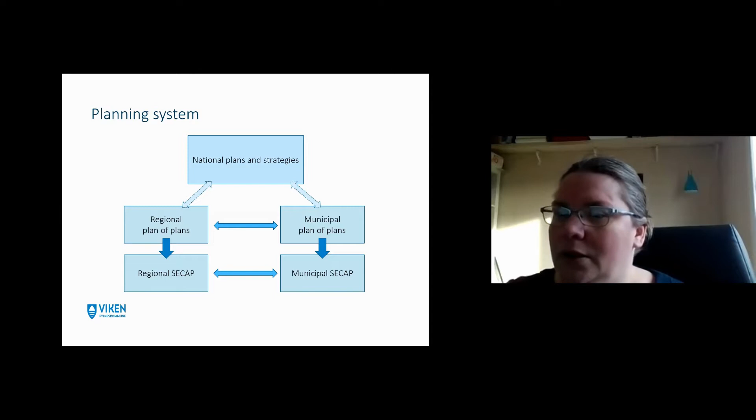We do not want to import all our food to Norway, but grow more ourselves. Less than 3% of our land mass is suitable for growing vegetables or grains, and the rest is basically mountains and snow. Grazing animals, such as cows, sheep, and reindeer, can produce food in the north, but they do emit methane. So we are discussing both how can we reduce emissions from agriculture and how can we store more carbon in the soil, in the grazable areas, in the forest, and in seaweed.

Some municipalities and regions set goals where they include carbon storage and thereby reach 100% net emissions. Viken has both - we have a very challenging 80% reduction goal, and this means that everything but the agriculture has to reach zero.

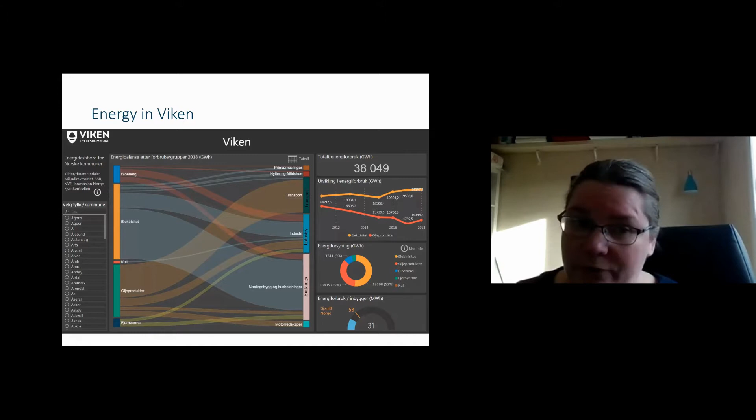We have in Viken set new goals just before Christmas, and we are currently in the beginning of a planning process where we are moving from these 2 regional SECAPs to 1. We are looking at an 80% reduction of scope 1 and some scope 2 emissions. But we also have set ambitions for targeting scope 3, the reduction of footprint in the goods and services we buy. And we have goals focusing on climate adaptations.

We have had a lot of discussions with our municipalities on how they should structure their SECAPs. Most are either separating the adaptation measures into a risk and vulnerability plan and only focusing on mitigation in the SECAP, or they are making integrated larger plans covering both adaptation, mitigation, and other topics such as biodiversity, transport, area planning, etc. I've even seen some smaller municipalities that have one annual plan covering everything. As long as everything is covered, all of these ways can work. But I must admit I've seen few plans that have managed to successfully integrate both biodiversity and climate into one plan. It often gets quite fluffy and not very clear.

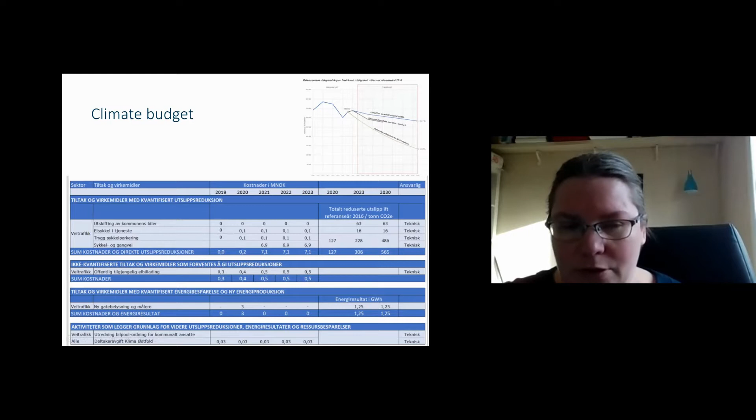To implement measures is, of course, the most important part of it all. We make our SECAPs through cooperation between the municipalities and between the municipalities and the region, and we implement them the same way.

We have established partnerships with the municipalities where we share the cost of a wide range of projects. We have partnerships with the agricultural sector where we provide training in energy efficient tractor driving, workshops on establishing solar energy on your barn, and much more. And we have a Pentahelix task force partnership with a steadily increasing number of businesses, NGOs and groups representing the citizens, academic partners, and representatives from the local, regional, and national authorities.

All of these partnerships are active in different projects, both with national and European funding. Some of the most successful currently, in addition to the Pentahelix projects, are a project where we let municipalities borrow fossil-free heavy vehicles and machines and test them.

I will leave a link in the chat where you can go and look at the machines. Most of the text is in Norwegian, but if you click on the links, you will find technical details and photos, and often links to English descriptions. So you can see many of the fossil-free machines.

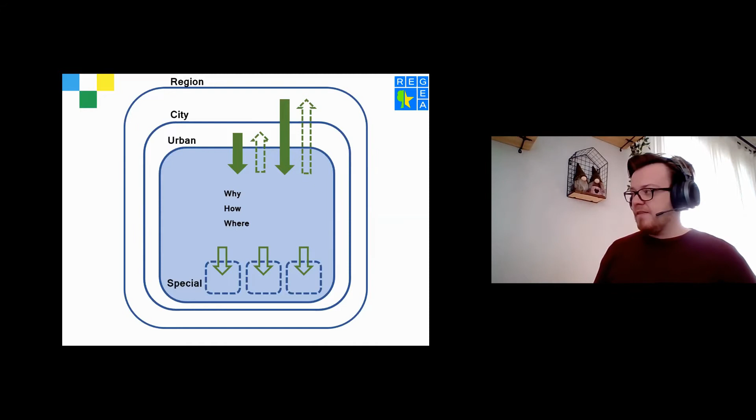And this is basically where we come to this issue of planning and implementation. So of course, depending on the structure of your country, it can be more centralized or more decentralized. In Croatia, we are very, very centralized. Usually there's a lot of tools to plan things. However, the implementation side lacks. And the key reasons for this are, on the first hand, very often the inability to set mandatory goals, and on the other hand, there is, of course, the issue of finance.

And I will now try to briefly present a couple of measures that we have started implementing in cities to try and combat both sides.

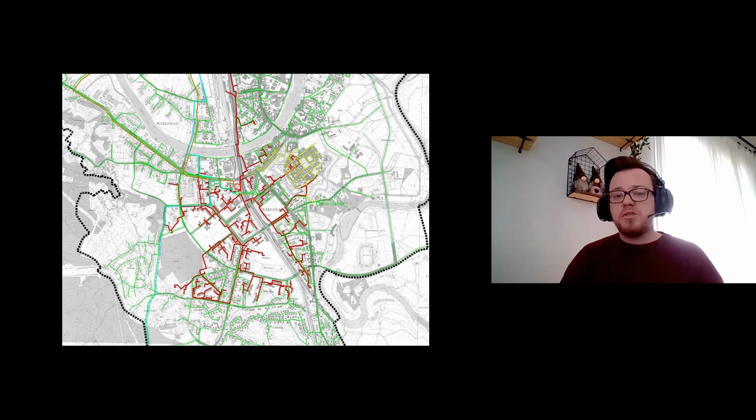And on the other hand, since climate planning is still very much in its infancy in Croatia, and I would dare to say most of Europe, a variety of negative climate effects are still very prevalent in our cities.

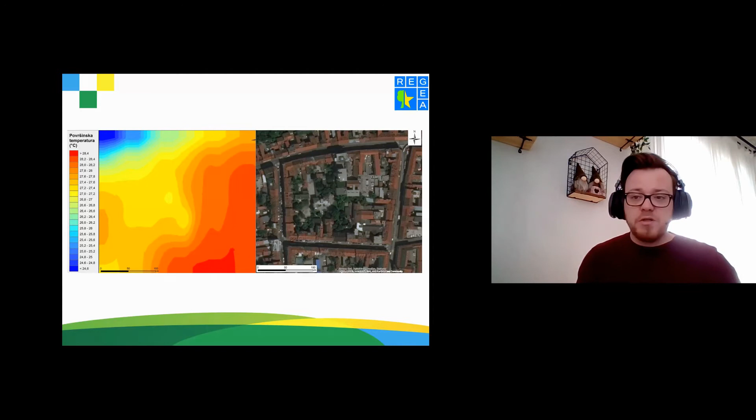This is also something that spatial planning doesn't really take into account properly. So the first thing we've started doing, now piloting in the city of Karlovac in Croatia, is to try and create our country's first green spatial plan. The principal idea is to properly and holistically integrate energy and climate measures directly into the city's spatial plan. Spatial plans come in a variety of levels - regional, city, urban, and special ones that cover just a small part of the city. So it's very important that such measures are integrated properly on all levels and correlated between them.

What will we provide in this case? We will provide proper measures that need to be implemented, definitions on how and where these measures should be implemented, as well as the spatial distributions of these measures. This can range from setting an above-standard of energy efficiency for a certain part of the city, to an outright ban for the use of fossil fuels in heating, to a mandatory implementation of green infrastructure, such as green facades, or simply trees next to roads or on parking places.

The primary driver here is that spatial plans are mandatory. So any measure that comes into it from a SECAP or any other source is law, and it cannot simply be ignored, such as action plans can.

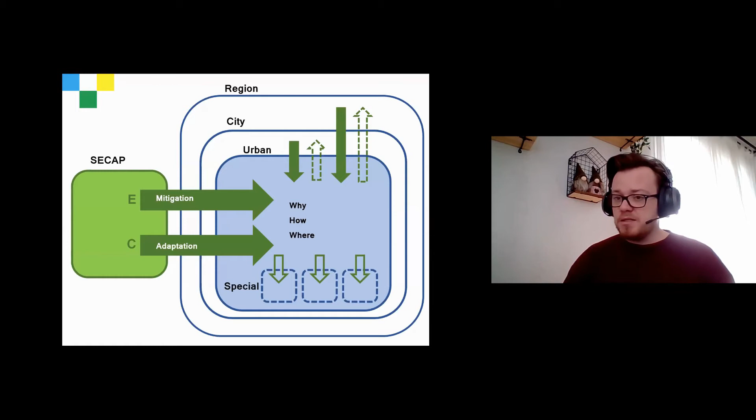And then there's the green infrastructure I've mentioned. As you've maybe heard, the city of Zagreb has been struck by a devastating earthquake, actually a series of earthquakes, that have caused severe damage to the city center. And as Churchill said, don't ever leave a good crisis unused - the city is now planning a very ambitious strategy to rebuild this city center.

This will include both the energy efficiency of the buildings, new sources of energy production, and also green infrastructure. This can be a very nice addition to any spatial plan - basically clear outlines of where and which types of green infrastructure should be used.

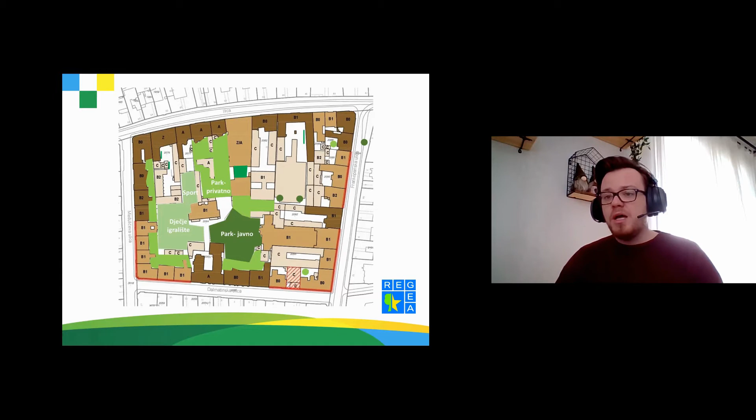Here you can see that same exact block I showed you a couple of slides ago. This is a draft plan to slowly transform it into a proper green oasis within the city itself, and with that also combat a lot of the climate issues we've seen.

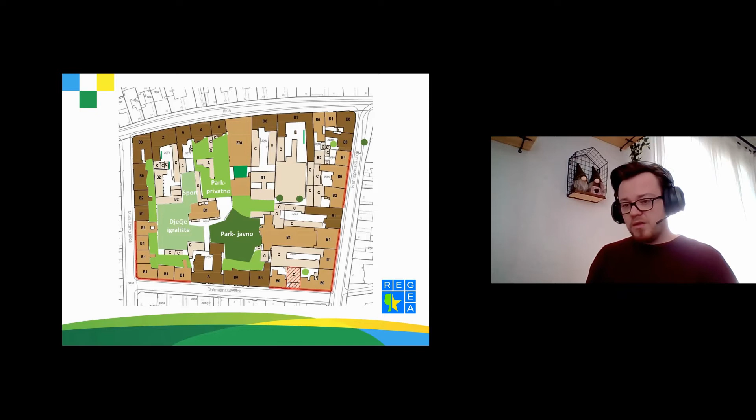Aside from planning, a huge issue for the implementation of energy and climate measures is, of course, finance. I don't know the exact situation in all the countries present here, but a huge issue that a lot of Croatian cities have is public debt - most cities are already indebted up to the level that they can take debt, so it's very difficult to accumulate enough resources to invest in high impact measures.

The way around this, the most efficient way, is the use of private capital. However, it's very often problematic to attract private investors into energy efficiency projects, especially in Croatia, due to the low prices of energy. Energy is still very often a social category, especially in Eastern Europe, so prices are kept artificially low, and realistic payback periods on a lot of energy efficiency measures can be 15, 20, even 25 years. Electricity production, on the other hand, is a different topic.

Here you can see an example of a power purchase agreement project that we have facilitated in the city of Zabok - specifically a large PV power plant constructed on the hospital's roof through a power purchase agreement contract. The key driver here was to attract a private investor to install a PV plant on the hospital's roof, and using that PV plant, the private investor sells electricity to the hospital at a rate 10% lower than they would buy electricity from the grid.

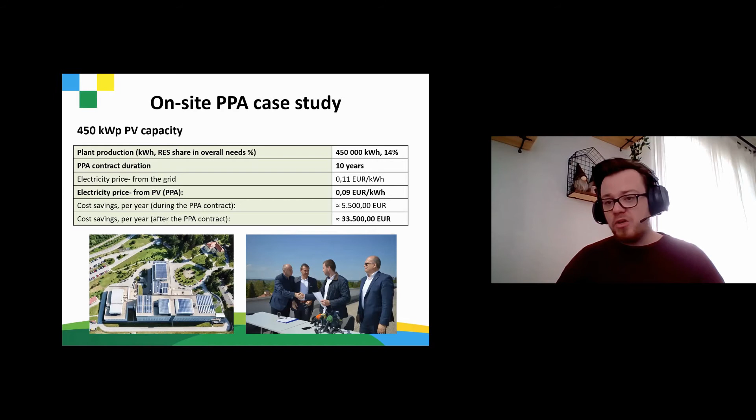After the contracts end, the hospital becomes the owner of the PV plant. The payback period for the private investor is between 5 and 7 years, so they still have a fairly decent margin to make profit. And the best thing is that the municipality or the public partner in this process does not have to pay anything up front, basically doesn't have to invest any of its own money, and therefore doesn't have to take up any debt.

The same process can also function for heat through a heat supply contract. This is another project being implemented in a school in our region, where through a very similar model, a fuel oil boiler has been replaced by a wood chip boiler. The issue here is that heat prices are fairly low, and the investment into a wood chip boiler is fairly high, so this project did rely on some subsidies. However, it functions on a very similar model, where the public side, the municipality, doesn't have to invest any of its own money, no additional debt is incurred, and they still receive a renewable source of heating.

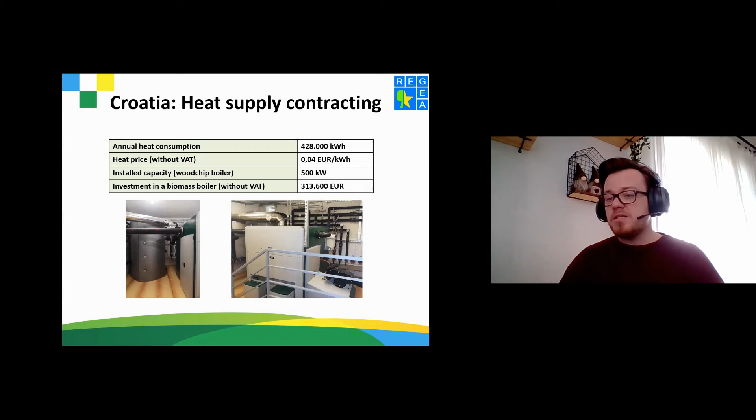Just to conclude, since my time is running out, a couple of lessons that we have learned throughout the last few years. The way forward, at least for us, is to integrate energy and climate directly into spatial planning. You can see a lot of examples of this happening across Europe.

Probably the most prominent and currently most famous example would be Vienna with its climate neutral zones, in which they have forbidden the use of fossil fuels, basically banning natural gas for heating.

It is very important to build up capacity within the local and regional authorities, and especially to enable them to use existing tools, such as the aforementioned spatial plans, for climate and energy purposes.

It is also very important to have a certain flexibility when defining energy and climate policies. As I mentioned, Croatia is a very centralized country, and we have this issue of our targets coming to the cities top down, without taking into account local resources and local potentials, making the whole process far less effective.

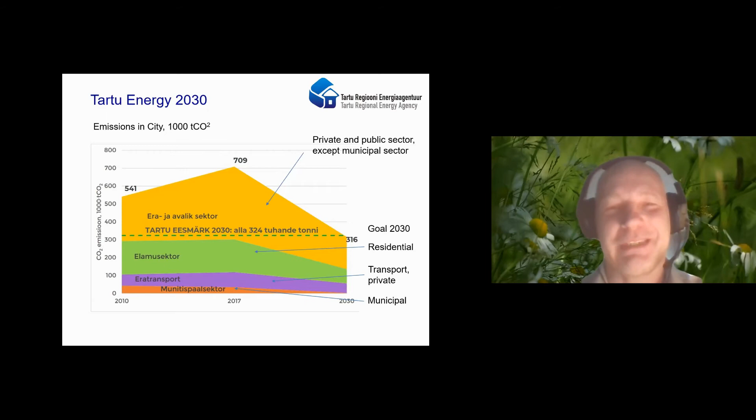So about this agreement, I can speak maybe next time, but today we will focus on the residential sector and the housing stock.

Renovation is not going very fast in Estonia and in Tartu as well. Tartu is maybe the second fastest city on renovation progress, but anyway it's not going as fast as we'd like, and that's why we had a demo project, and about that project I will tell you. But overall, in the city of Tartu we have close to 1,000 multi-apartment buildings, and in this slide you see the renovation progress by year of multi-apartment buildings.

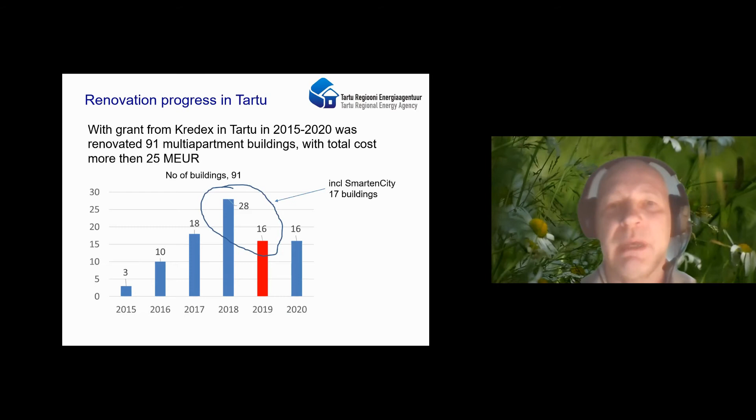We have a national support grant for renovation, and today it provides 30% of costs for renovation of multi-apartment buildings, and from last year they started one for single family houses as well. So we have both grants on the table, and it helps a bit, but it's not enough, and that's maybe about the cost in Estonia — we have a problem with money, as always, in the residential sector.

So, it's last year and the average cost of renovations - usually when a grant will be launched and announced publicly, this makes the market, let's say, a problem for businesses. Businesses see the opportunity, especially construction companies, and the prices of renovation start increasing a little bit. So it's always a problem. Our government and Kredex announced more stable grants, because previously we had yearly grants - every year they'd announce grants would be available, but now they like to announce that the grant will be available for 4 or 5 years, so it will make the market more stable, and we hope the prices of renovation will be stable as well.

But it's a barrier, one problem in this movement. But anyway, to make renovation more attractive, the City of Tartu was part of the project Horizon 2020 called SmartEnCity.

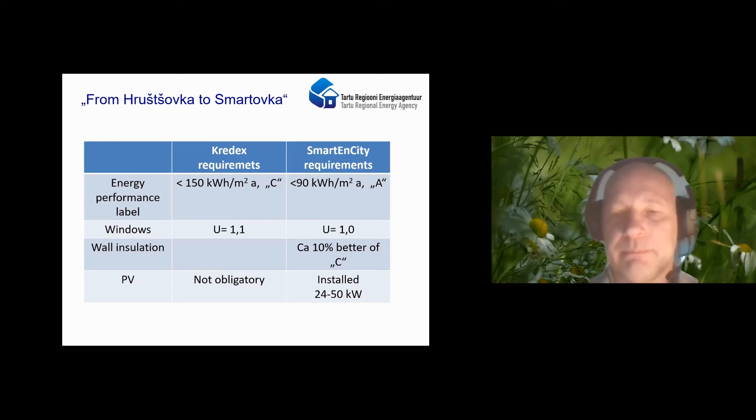About ventilation: the national requirements call for ventilation with heat recovery, but we took a step further. We suggested ventilation with heat recovery on demand, with CO2 as the measured KPI which would manage and control the ventilation. We also installed smart home solutions.

To make these old Khrushchevkas more attractive, we put work art on the exterior walls of every building, so the city looks nicer now than it was.

And of course, a very important thing is training of residents - how to use and live in the new building situation, and on energy performance and energy efficiency in general. It's very important to train residents as well.

So here's an overview: altogether 17 buildings - as I mentioned, our target was 20 buildings, but a couple of buildings left the program. Anyway, we achieved 32,000 square meters, built more than 600 kilowatts of PV panels. The heat reduction was on average one-third, and power consumption decreased by at least 20-25% as well.

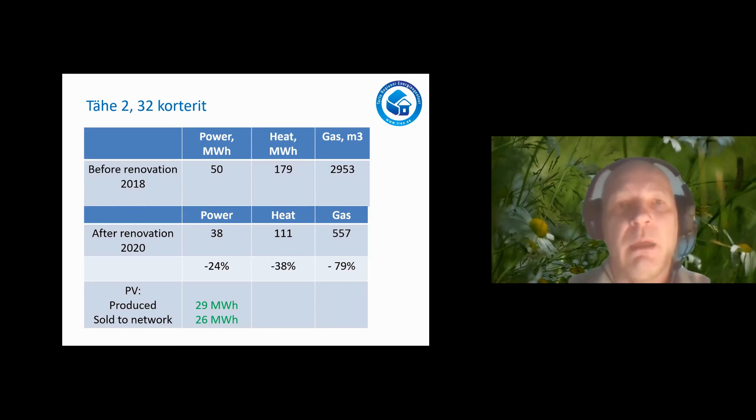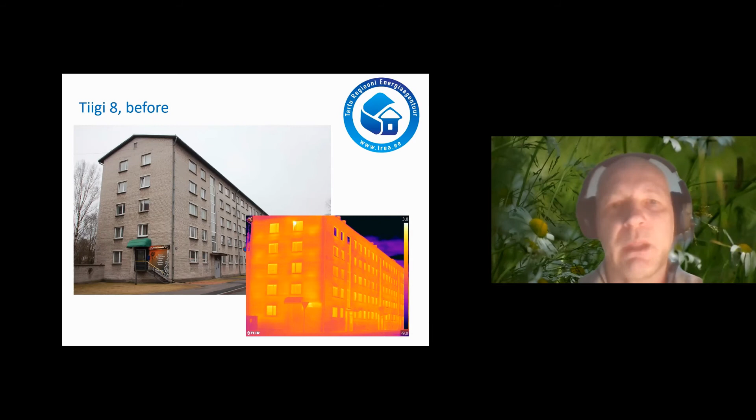And the second example, Tiigi 8, it's the biggest one, 60 apartments. Today it looks like this, and they get quite good data as well. Both buildings are in energy class A, and as you can see, they have reduced energy consumption quite a lot.

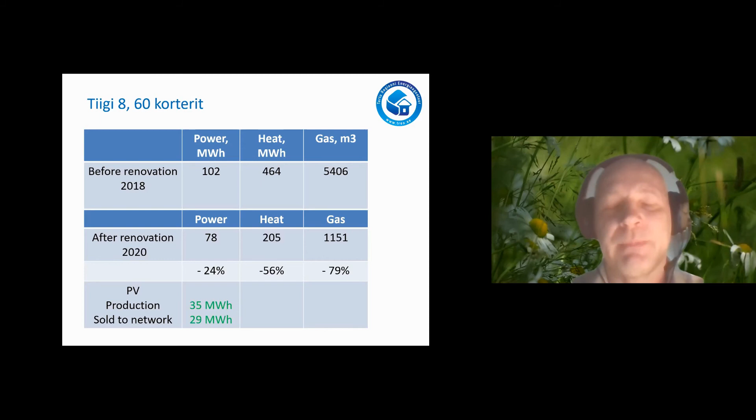And again, here is the challenge: how to use the generated electricity much more than they are using today. Here there's a little bit better share, but anyway it's not good enough. And there are some solutions, let's say, for how to do it.

So as I told, we installed a smart home solution. It's not something very fancy, it's quite basic. You can control temperature, you can control ventilation a little bit, and you have running consumption data, comparing with last month whether you have minus or plus compared to last month's consumption.

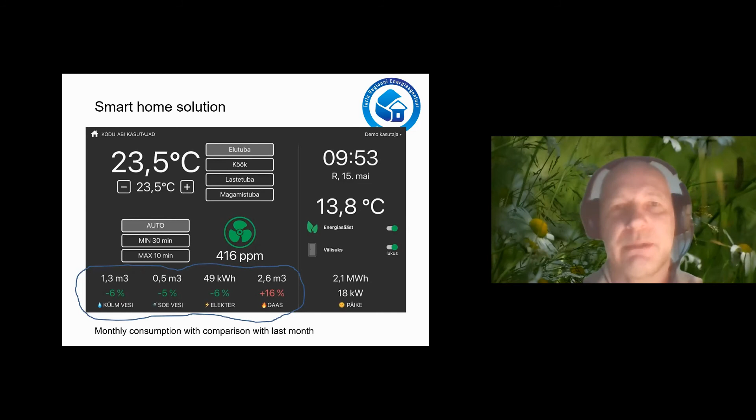So it's very basic, but anyway it's something, and it keeps residents who like to be informed and who like to control consumption able to do it. And that's why it's good. This smart home solution was installed in every apartment, and we provided training on how to use it, and of course we provided many trainings on how to live in these conditions.

So what we have learned is that it becomes very important to prioritize in-depth planning. It needs to be very clearly discussed, sometimes very heavily, and it's always very hot discussions between residents about what to do with our building.

But anyway, you need to somehow renovate, and that's why technical consultations are very good if they have some technical persons who help them understand how to achieve good indoor climate in apartments, how to achieve energy efficiency, and how to make the building look nice. So in every part you need some outsourced knowledge in most cases, and that's what makes pre-renovation consultations and pre-renovation planning so important.

Of course, in Estonia technical design is in good hands if we look at the KredEx grant, because if you have a technical design already, it will be assessed by KredEx, and it will avoid big mistakes at the design phase already. And of course, if there's a lot of money in the market, the quality of work will decrease. I can say honestly, a lot of companies like to go for the easy money because there's a lot of money in renovation. So new companies are coming, and on one hand it pushes prices up, and on the other hand quality will be lower.